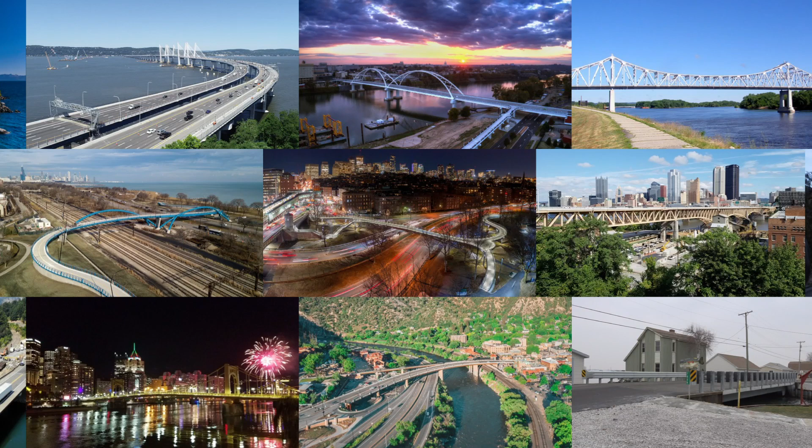Welcome to this year's presentation of the American Institute of Steel Construction and National Steel Bridge Alliance's Prize Bridge Awards, recognizing innovative design in engineering bridges using structural steel. The Prize Bridge Awards are the highest honor the U.S. structural steel industry bestows upon steel bridge projects around the country. 19 outstanding projects in 9 categories have been selected to receive the 2020 Prize Bridge Awards.

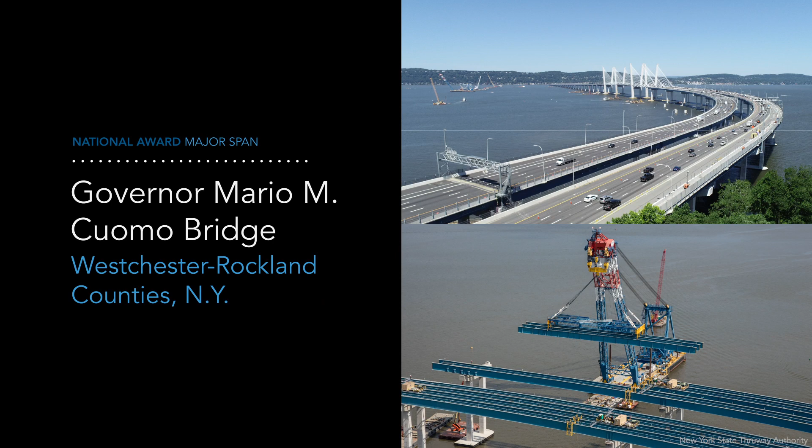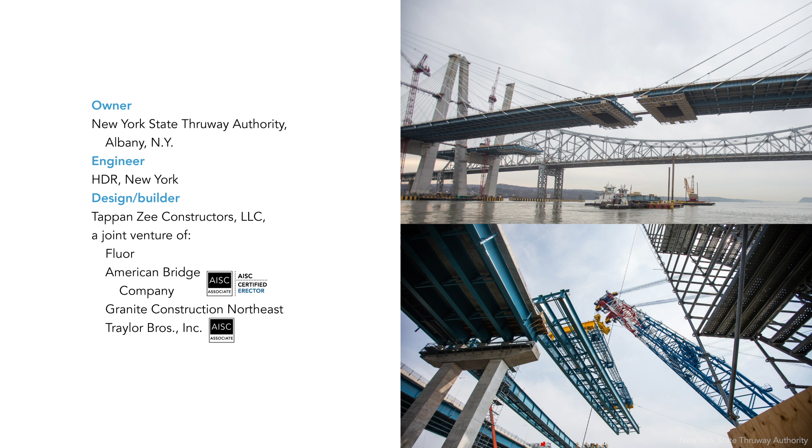Let's start with major span projects. AISC and NSBA present the national award in this category to the Governor Mario M. Cuomo Bridge in New York. The Mario Cuomo Bridge is the largest and most significant steel structure that's been built in the United States in decades. A bridge like that is only possible because of the unique long-span capabilities of steel structures.

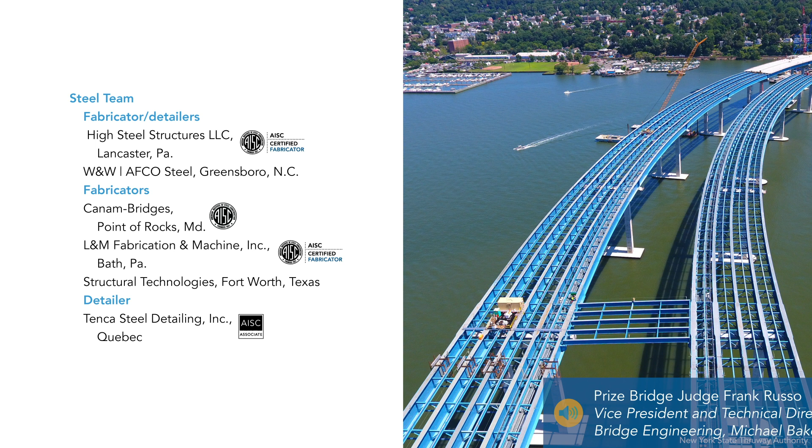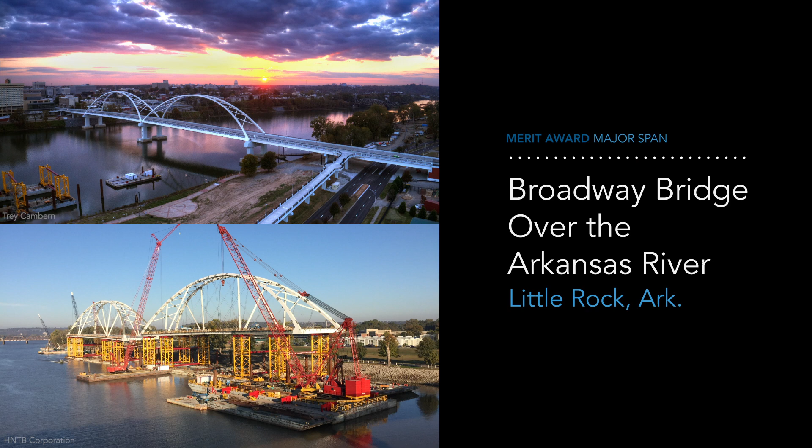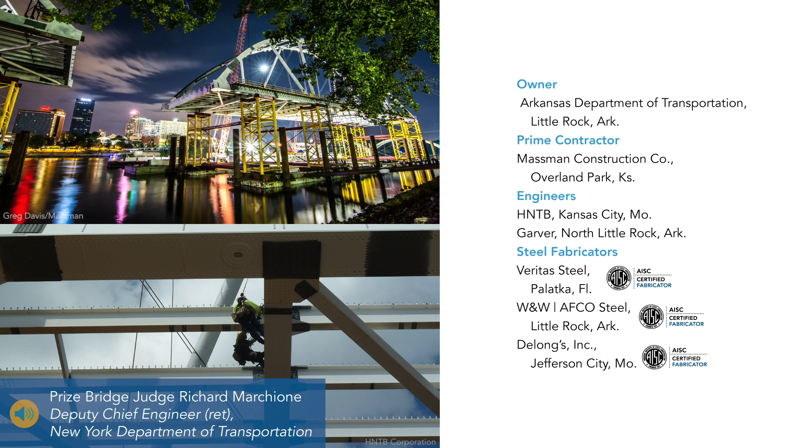The Broadway Bridge over the Arkansas River wins a Merit Award. Judge Richard Marchione commended the project's ability to minimize the disruption of traffic. He used low drill equipment to be able to install the foundation below the bridge while the traffic was still on it, and allowed for the new arches to be constructed adjacent to the bridge off-site and floated into place.

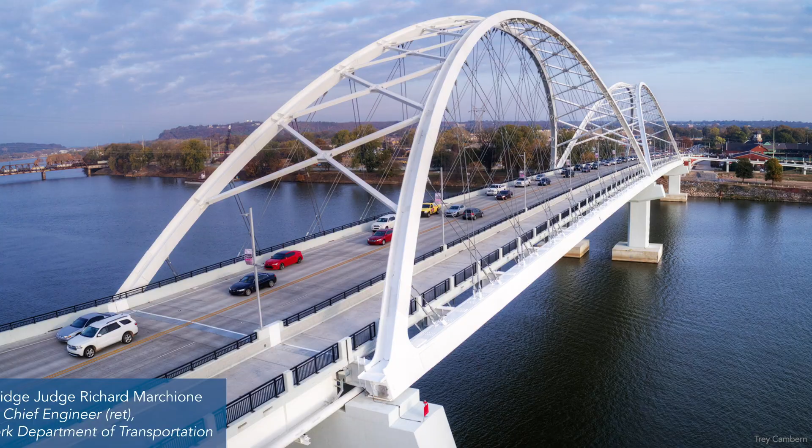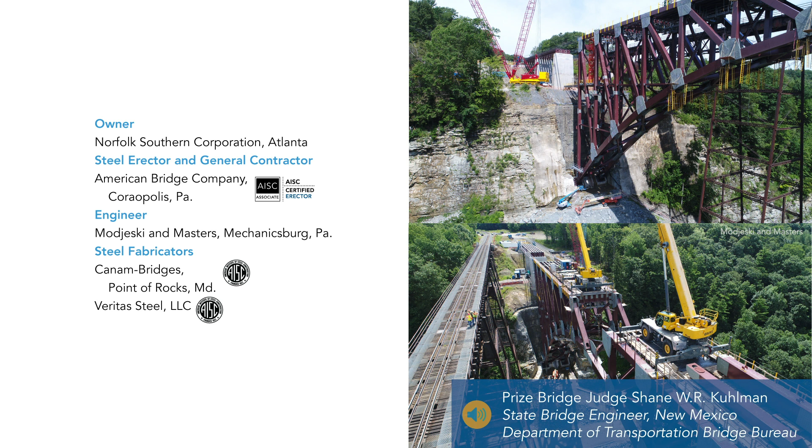We also present a Merit Award in this category to the Portageville Bridge replacement in New York. Portageville Bridge was a unique bridge replacement. That type of bridge hasn't been built in nearly 100 years. It was a great solution, and it was environmentally sensitive and aesthetically pleasing.

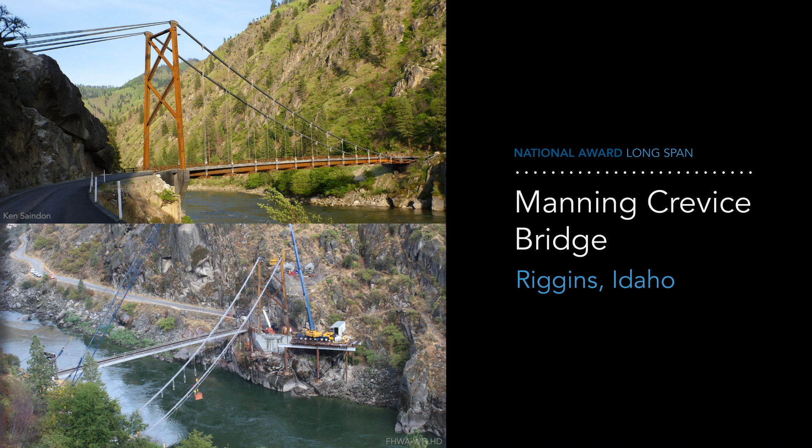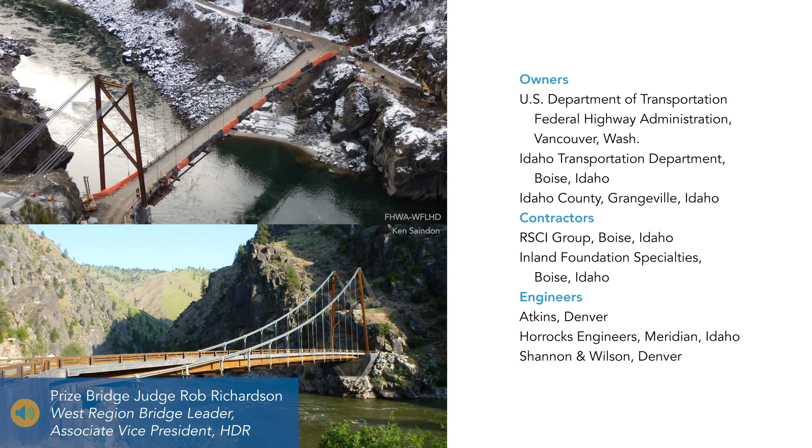The National Prize Bridge Award in the category of long span bridges goes to the Manning Crevice Bridge near Riggins, Idaho. A lovely bridge. It's a nice suspension bridge. And in the context of its site, it's a difficult site to get to. There's so many complexities involved, but at the end of the day, it looks like it just fits.

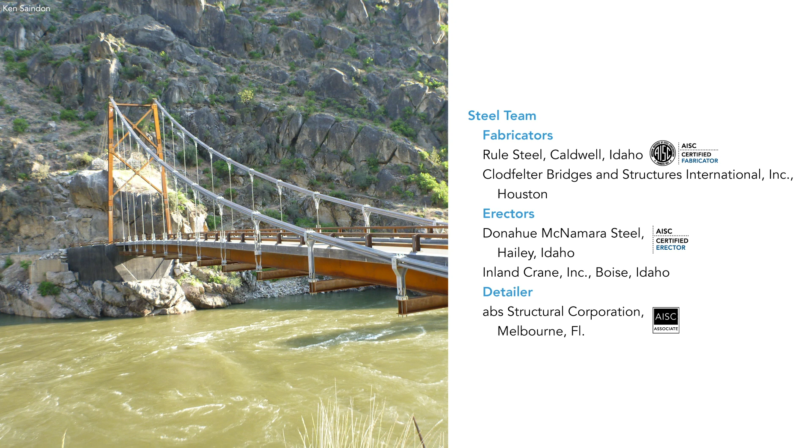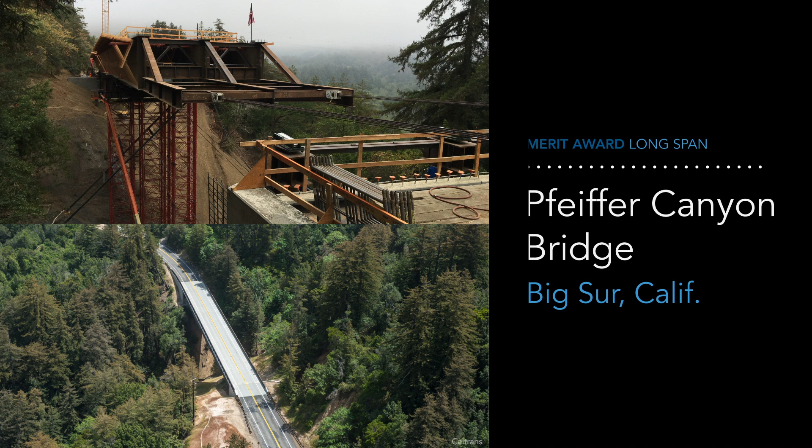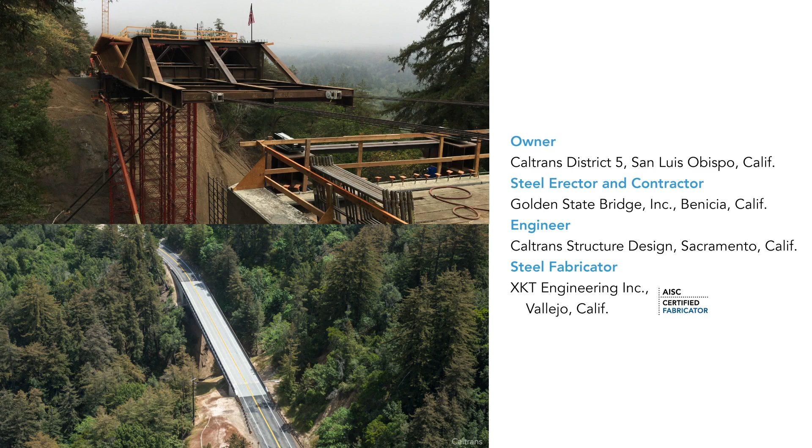The Pfeiffer Canyon Bridge in Big Sur, California earns the Merit Award in the same category. This bridge reconnected a California community after a landslide damaged a concrete bridge across narrow mountainous terrain beyond repair, so much so that food and fuel were brought in by helicopter. Judge Shane Coleman described the bridge as a success story for emergency bridge replacement.

We continue our Prize Bridge Awards presentation with the National Award for Medium Span, the Grand Avenue Bridge in Glenwood Springs, Colorado. This bridge did well within the environment it was placed, with a park underneath, and the way they used the steel superstructure and transitioned into a concrete cantilever was really unique.

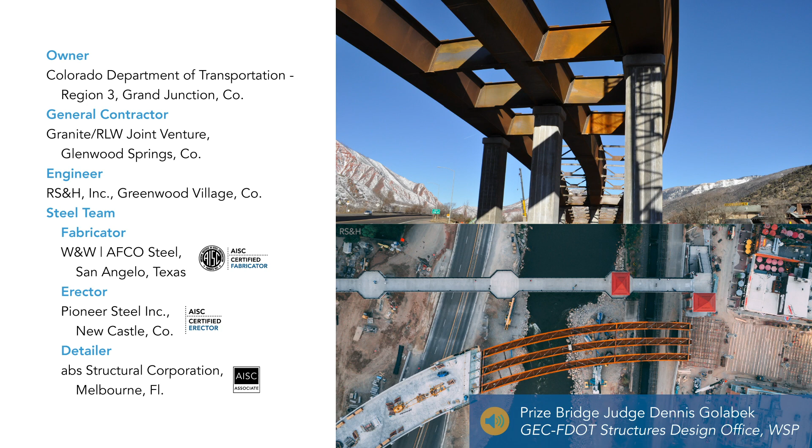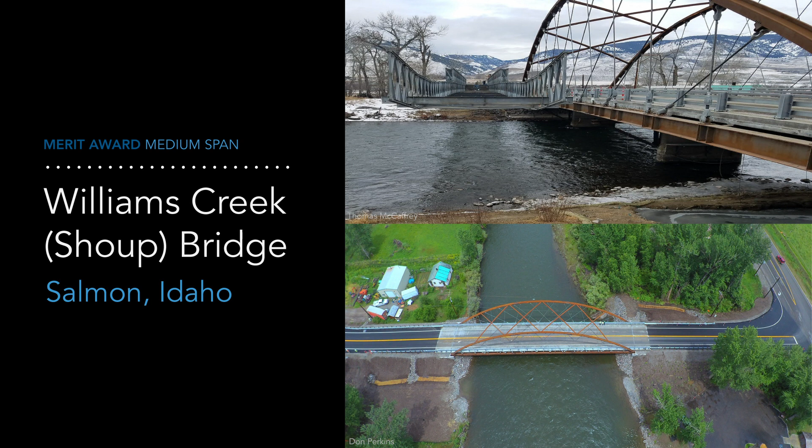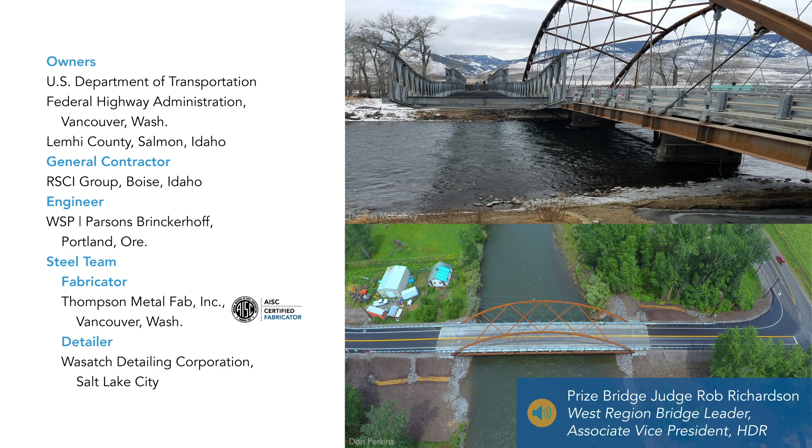The Merit Award in this category goes to the Williams Creek Shoup Bridge in Salmon, Idaho. Judge Rob Richardson said the network arch bridge beautifully enhanced the site. The span is a medium span, not something you necessarily expect to see a network arch in, but with the constraints that they had in the roadway, it allowed them to have a nice thin deck, and that way they didn't have to do a lot of work on the approaches. And it's beautiful. I mean, it's a really nice bridge. Contextually, it fits very well on the site.

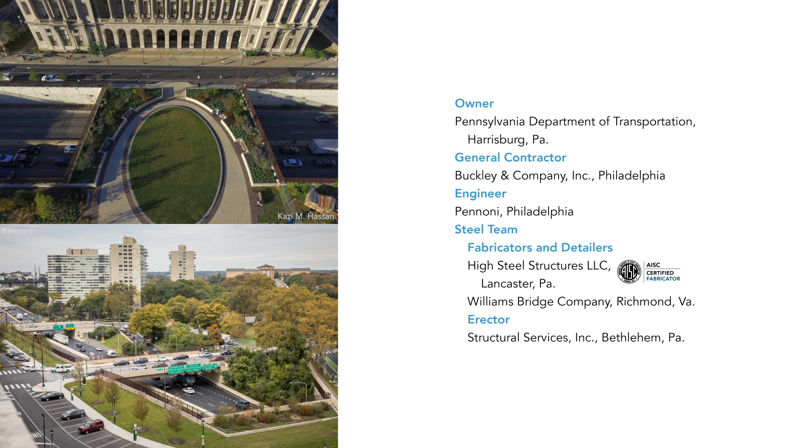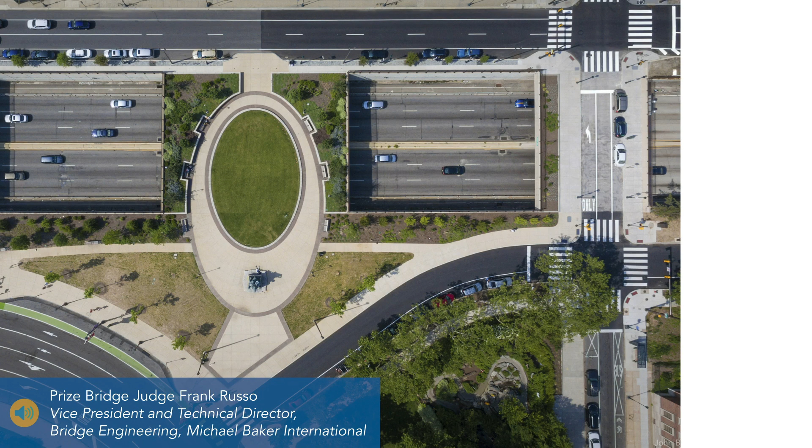AISC and NSBA present the National Award for Short Span Bridges to Philadelphia's Vine Street Expressway I-676 Bridge Reconstruction Project, 18th to 22nd Streets. The Vine Street Expressway bridge replacement projects are an example that sometimes a bridge replacement is much more than a bridge replacement. Replacement of these bridges enhances the entire streetscape for multiple city blocks in the City of Philadelphia's Museum District.

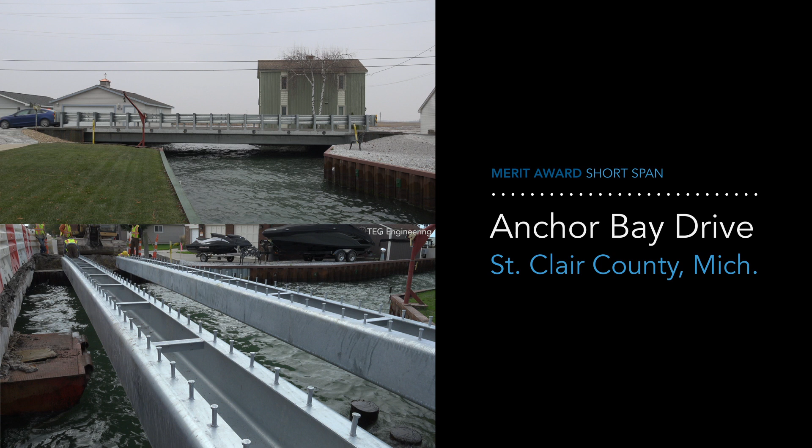Anchor Bay Drive in Michigan wins the Merit Award for Short Span Bridges. Judge Dennis Golobeck commends the project for its efficient, economical design and clean details.

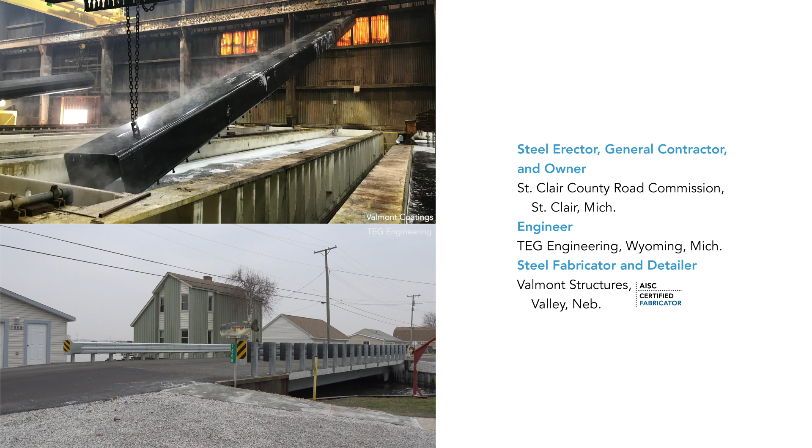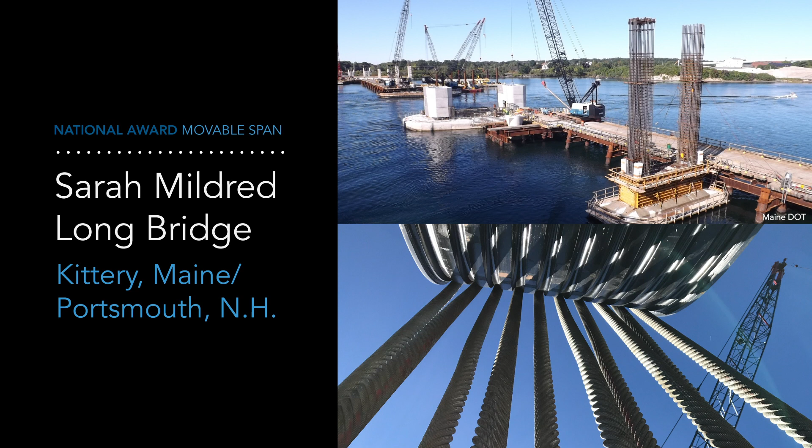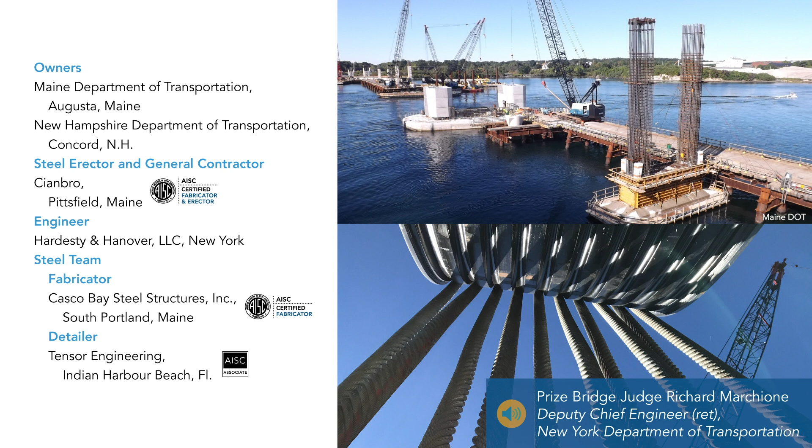The Sarah Mildred Long Bridge between Maine and New Hampshire wins the National Award for Movable Spans. Judge Richard Marchione particularly liked the bridge design for its low disruption of traffic on a daily basis. The bridge has split-level approach spans, but a single lift span in the middle that can land for either highway traffic or rail traffic, which minimizes the number of openings for the bridge.

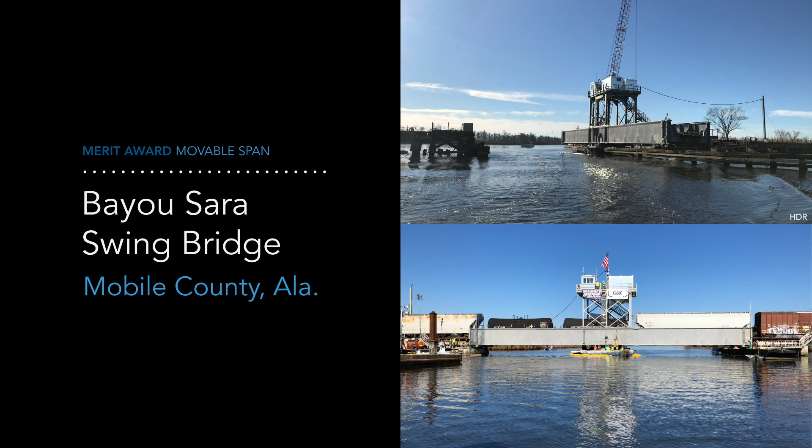The Merit Award for Movable Spans goes to the Bayou Sara Swing Bridge in Mobile County, Alabama. The replacement is an outstanding example of collaboration between the owner, the designer, and the contractor. When a 90-year-old swing bridge had to be replaced, the only solution was steel. Collaboration resulted in this bridge being replaced in only 14 hours.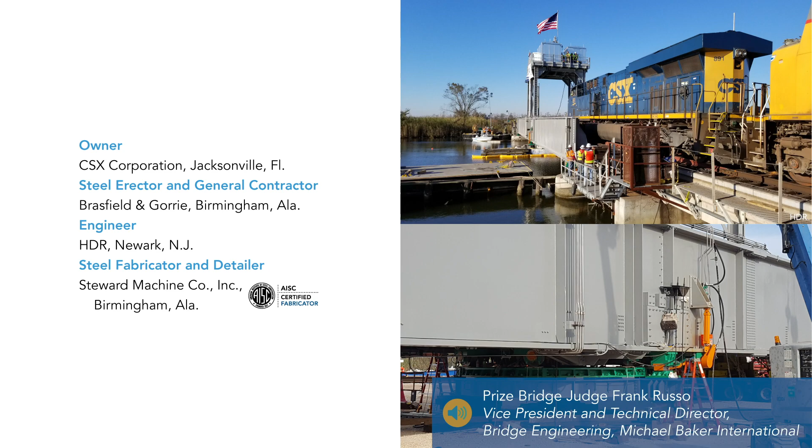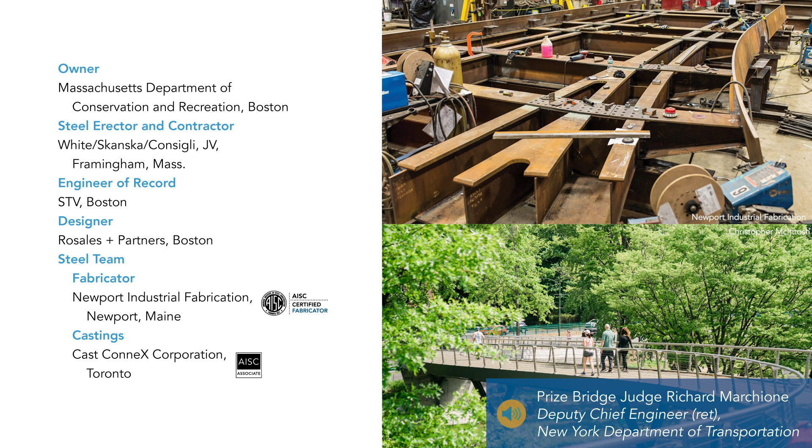The National Award winner for Special Purpose is the Francis Appleton Pedestrian Bridge in Boston. The Appleton Pedestrian Bridge over Storrow Drive provides a unique, beautiful solution in the urban landscape right along the Boston waterfront that'll provide many years of enjoyment for the people of Boston.

The 41st Street Pedestrian Bridge in Chicago wins a Merit Award in the same category. Judge Shane Coleman notes the new bridge replacement was a unique solution for the crossing. The aesthetically pleasing bridge came in under budget and ahead of schedule.

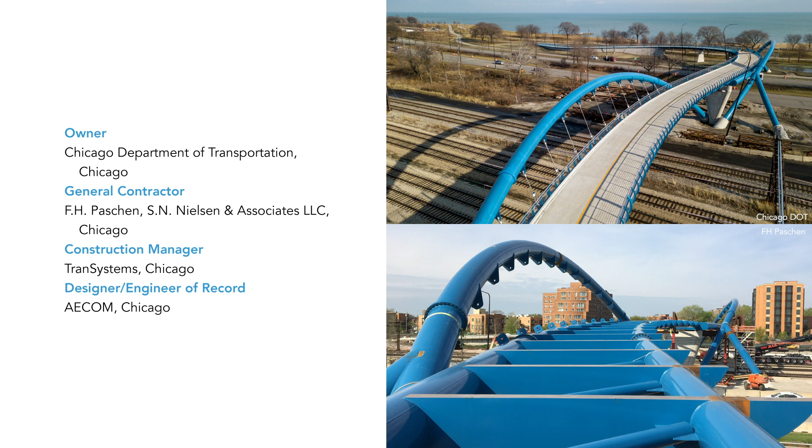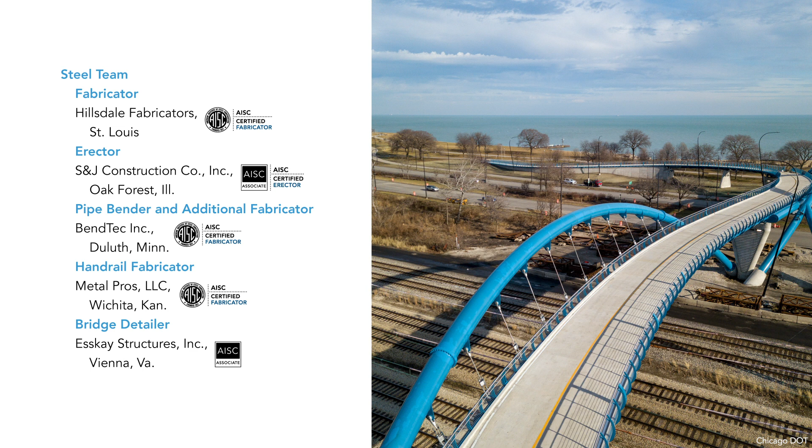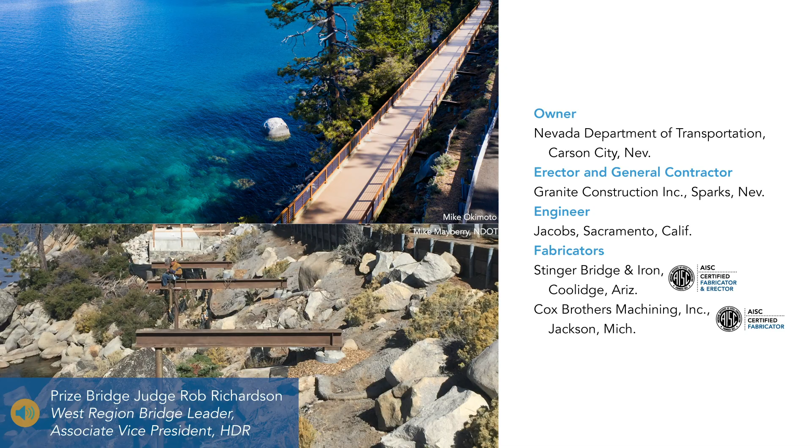We also present a Merit Award to the East Shore Bridge in Lake Tahoe, Nevada. It's interesting because the steel doesn't really stand out in the bridge, but this bridge is only possible through steel. The site is very difficult to get to. It's off the side of a hill, and by marrying the bridge substructure and support system with FRP deck, very lightweight, they're able to achieve something that almost is invisible.

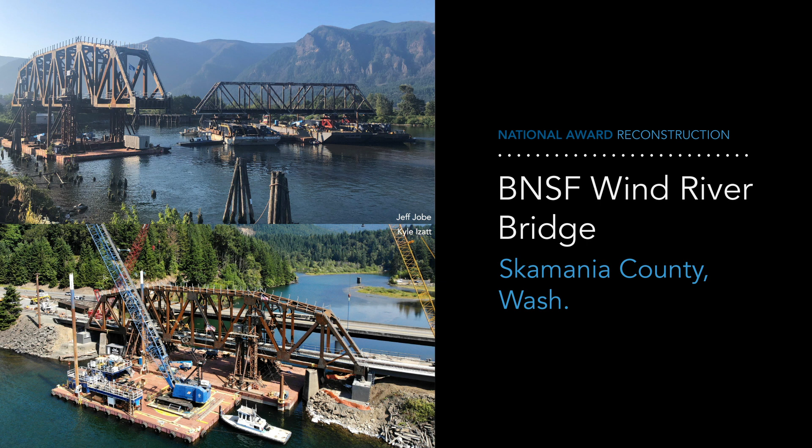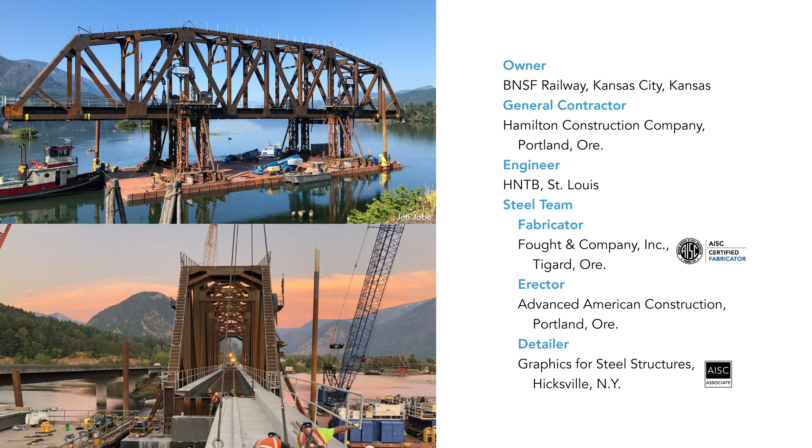The National Award for Reconstruction, New Structure on an Existing Alignment goes to the BNSF Wind River Bridge in Skamania County, Washington. The prize bridge jury recognizes the project for overcoming a challenging construction process, floating the trusses into place. Judge Shane Coleman also noted that its use of weathering steel will provide a long-lasting service life.

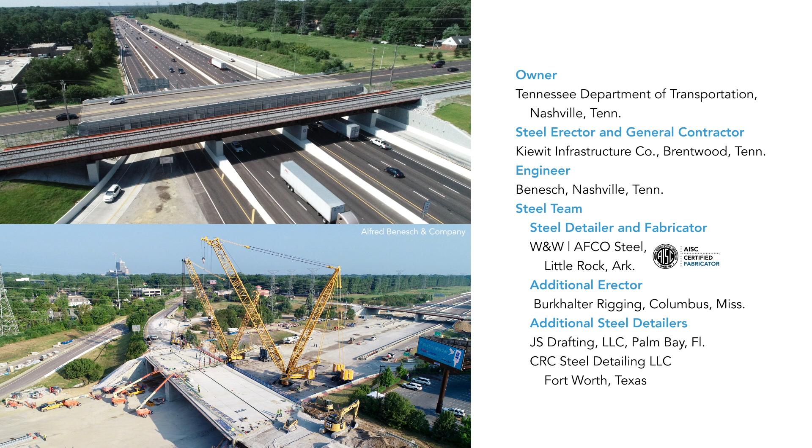AISC and NSBA present a Merit Award for Reconstruction to the I-240 MEMFIX 4 project in Memphis. Four bridges used the innovative accelerated bridge construction process requiring short-term total road closures, allowing crews to work around the clock. Using this process sped up the project, completing it in months instead of years. The reconstruction provides a safer commute for the 50,000 vehicles that travel it every day.

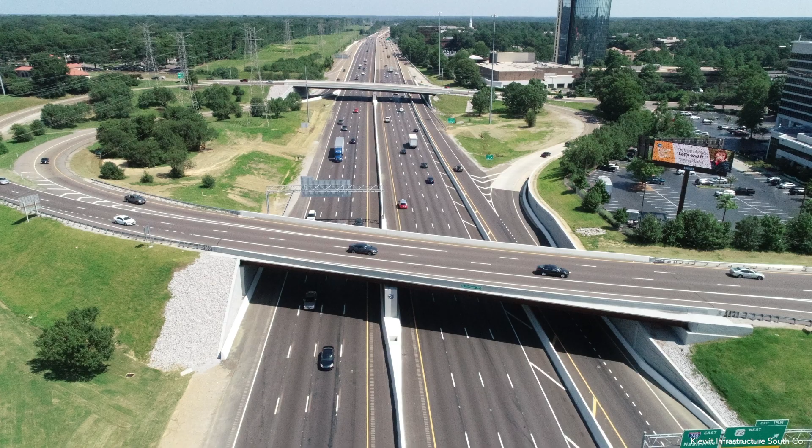A sister bridge to the 6th Street Bridge that won the first prize bridge award in 1928, the Andy Warhol 7th Street Bridge in Pittsburgh wins this year's National Award for Rehabilitation. Existing structure and primary members remain in use.

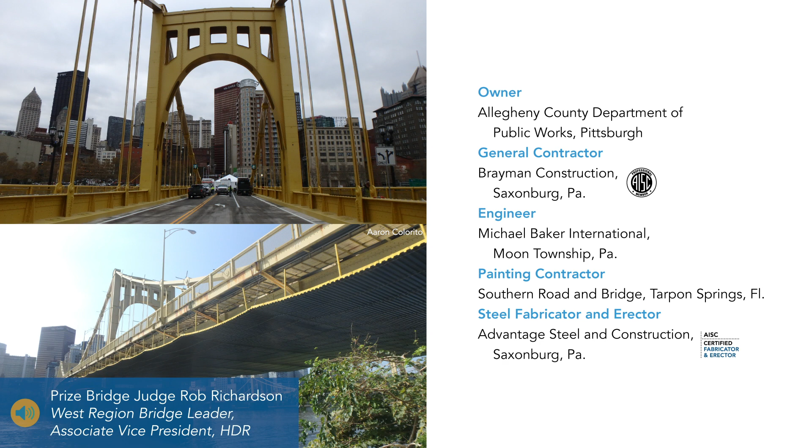One of the things that I think is so important is that we do work to preserve our infrastructure, especially when it's an iconic bridge like this. We're talking about one of a handful of self-anchored, cable-supported bridges in the U.S., even though it does have a twin that's right up the river. But it's just kind of one of those things that I think it's very important that we take that very serious. And this project was a beautiful example of keeping something like that, not only there for its visual appeal, but it functions as well.

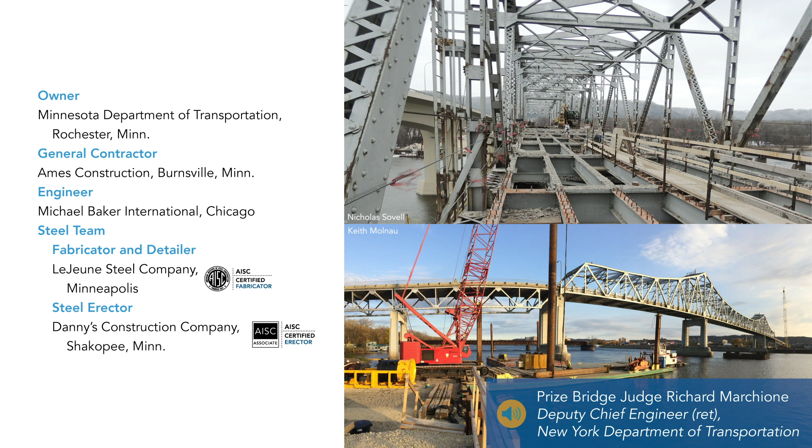We present the Merit Award for Rehabilitation to the Winona Bridge in Minnesota. It's a complex historic truss bridge that required incorporation of some internal redundancy to both rehab and strengthen the bridge, but more importantly, reduce the non-redundancy of the bridge and allow the state to take it off of the fracture critical bridge list.

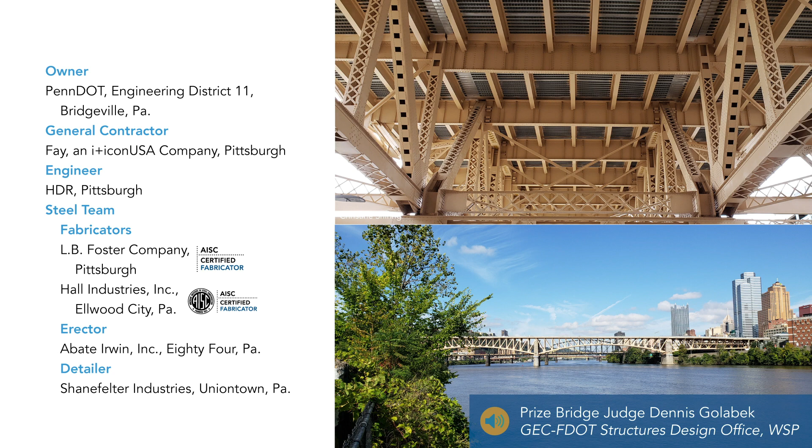Originally constructed in 1928, the Special Award for Resilience goes to the Liberty Bridge in Pittsburgh. Unfortunately, there was a fire that was caught underneath the bridge that melted some of the steel there. And so it got this special award because of how it still withheld its load and did not fail, and that they could fix it in place, and just showed how superior steel is to some other materials. And that's why this deserved a special recognition.

19 outstanding projects in 9 categories have been selected to receive the 2020 Prize Bridge Awards. Please join us in congratulating them on their remarkable achievements.